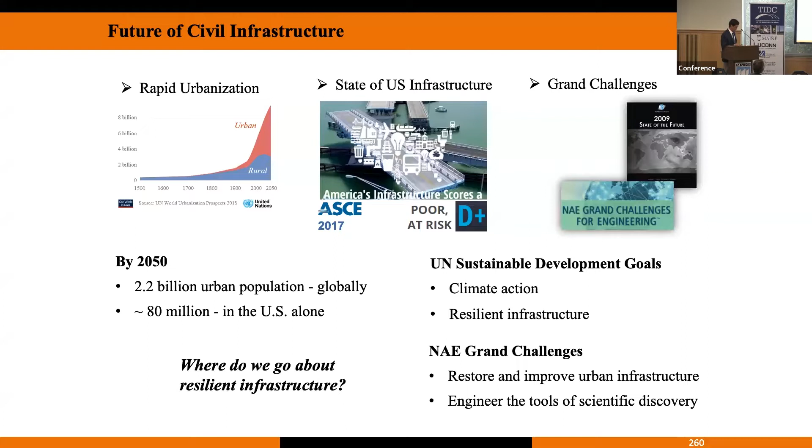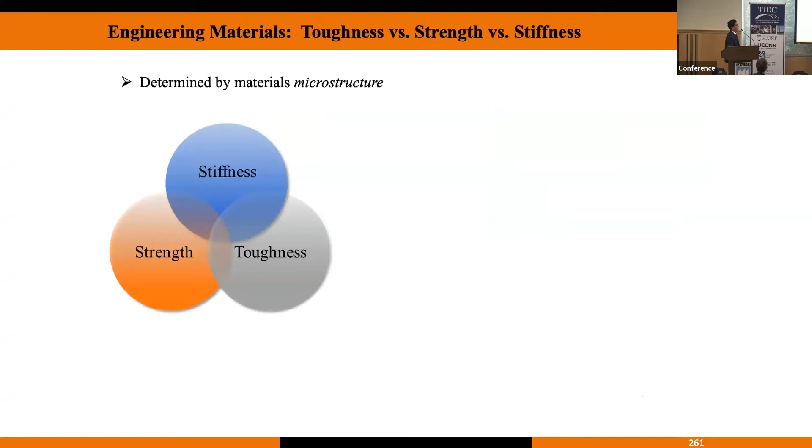How do we go about resilient infrastructure? If you think about the fundamental properties of material—strength, toughness, and stiffness—this comes with a trade-off. The way we process the material affects the microstructure, and that defines the properties and performance. When you come up with fiber reinforced concrete or polymer reinforced concrete, what we're changing is the microstructure. Therefore, you can control the properties and performance, and hopefully improve the durability.

But that comes from the fact that we process the material in mostly conventional ways, by casting, pultruding, or ways that are considered advanced manufacturing for the most part. But that's not the only way we can manufacture the structures. You can manufacture structures through various ways, by laser processes, by additive manufacturing these days.

That means you can control not only the microstructure, but also the mesostructure, where depending on your nozzle size, you can control the architecture of the structure. That enables another degree of freedom to control the properties and performances at scales more applicable to infrastructure materials, hopefully without the cost of expensive advanced manufacturing processes.

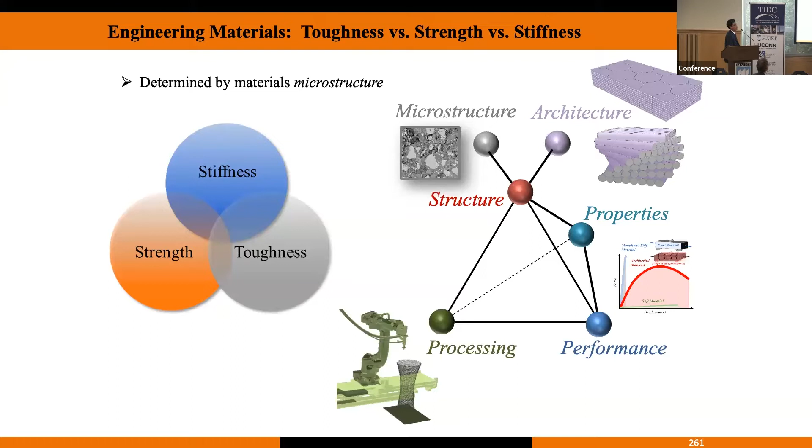So back to this chart, there is a scale. At this scale, you can change the way you process the material, change the microstructure, but civil infrastructure is here, right? In between, you have this architecture scale where you can change the way you arrange the material.

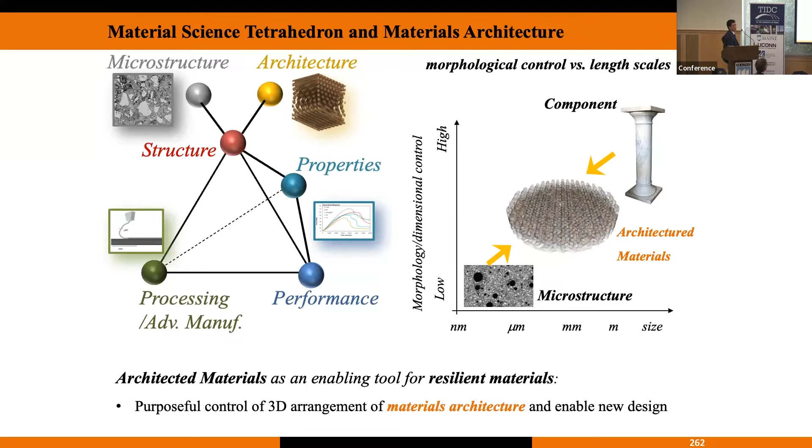Of course, you have to have the processing in place. With that comes the definition of architected material, where you can define and design purposeful arrangements of material and therefore control their response. So what we do, for the most part, at least in my group...

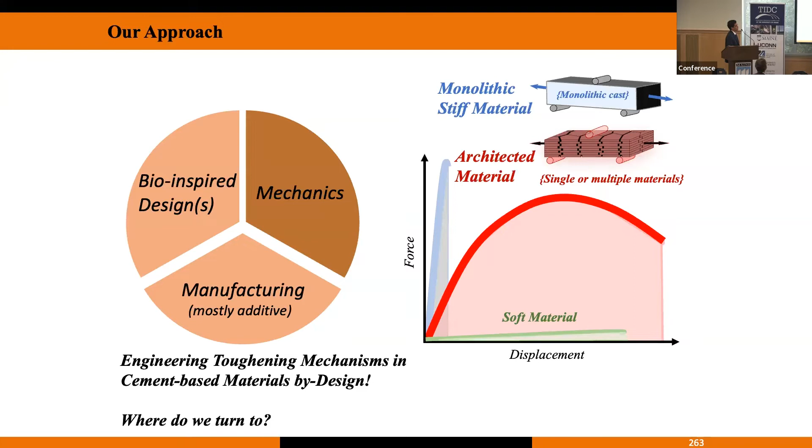For us, design comes from nature. We turn to nature. Nature offers abundant examples of resilient biological materials that can inform the design of hopefully resilient infrastructure. Of course, you have to have enabling manufacturing processes, and you have to understand the mechanics that informs these designs.

I'm going to do a quick transition to nature and back to more real context. If you think about nature, the building blocks of nature are basically either proteins on one side, which are ductile and deformable but not so strong - they don't have high strength. On the other side, you have minerals - calcites and aragonites that have high strength but are brittle.

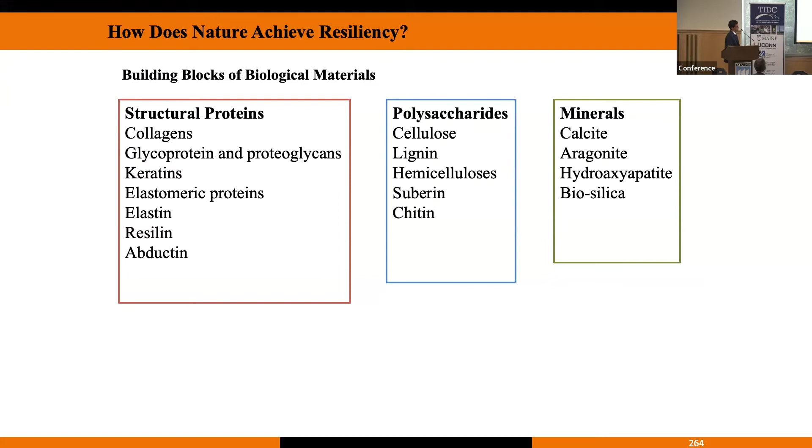In between, of course, you have polysaccharides. The more you move this way, you get stiffer, stronger material. The more you move back, you get tougher material, more ductility.

So let's compare natural materials now in the context of strength, stiffness, and toughness with engineering materials. And of course, composite is going to be in this chart. Let's see where it is.

Here's the trade-off, right? Engineering materials, you can increase the stiffness, or the strength, by moving from essentially composite to ceramics. But of course, that comes at a cost on the y-axis - you have KIC, that's fracture toughness, in other words resistance to cracking. On the other side, you lose the ductility, you end up with a brittle response.

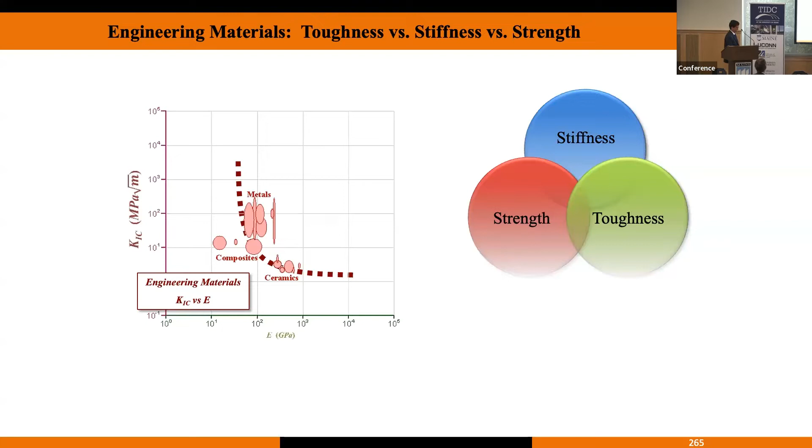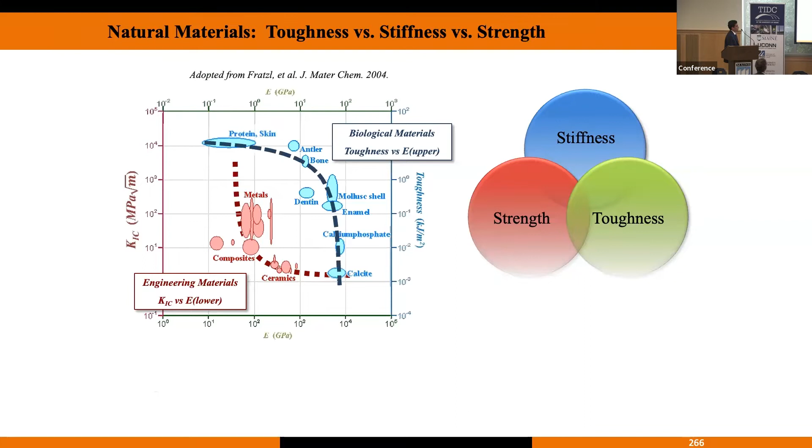There are abundant examples. Nacre, most of you probably know, but if you don't, mother of pearl - it's a shell, and it has a brick and mortar type of architecture, very different from the brick and mortar we know in construction, but actually not far from achieving that in construction.

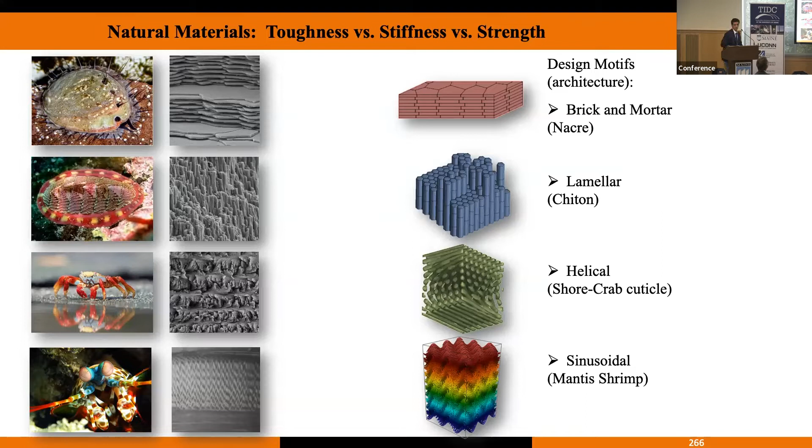And many other examples - chitons, mantis shrimp. It has the fastest punch in the animal kingdom, and if you don't put it in a glass aquarium, because it will break it for you, and so on.

There are many more examples, so I'm not going to get into the details, but what happens here is that, depending on the property you want, there are two ways you can design materials. One is you want impact resistance, ductility, or damage resistance. Depending on the property you want, you can go look for the right biological species, or you can be exploratory and find the right biological species you're interested in, and then try to understand the microstructure, but more importantly, the mechanisms with which the species survives and improves these trade-offs in material properties.

For example, if you take the nacre example, you can increase the toughness of otherwise brittle materials. 95% of nacre is calcite - there's only 5% polymer in there. But by arranging them in such a brick and mortar fashion, you can get a fracture toughness that is 3,000 times higher than the calcite itself.

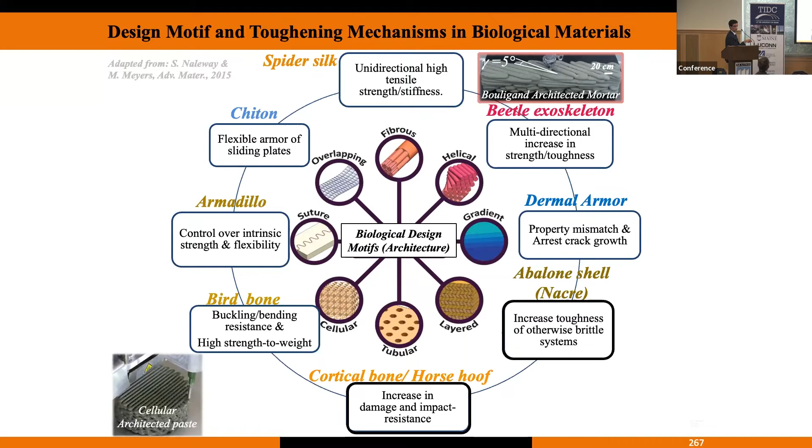So it's an interfibral bundle of fibers—you have fibers and then interfibral matrix in between. For every orientation, there's a bilayer orientation. It turns out that this layer essentially arrests the crack, while the other makes it harder for the crack to propagate, because as you twist the crack, it's harder to shear a crack than to open a crack, if that makes sense.

So there are a variety of examples, variety of mechanisms that exist in this one. I just mentioned crack arrest and crack twisting. But what happens is that if you fabricate mortar or concrete structures out of this using additive manufacturing, can you get improved properties? It turns out that you can.

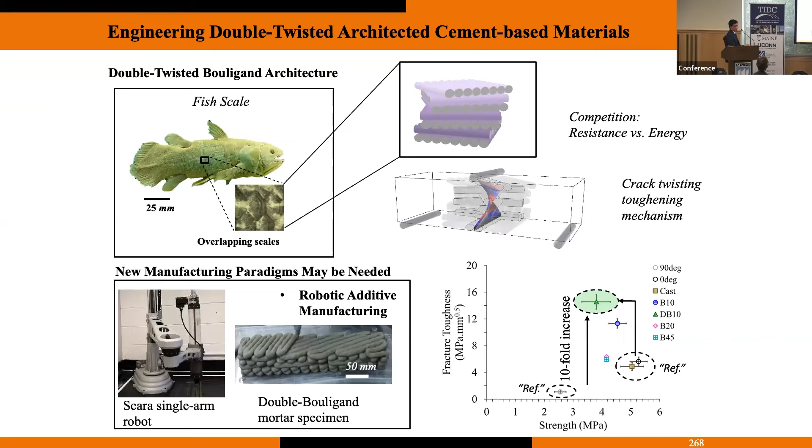Depending on your reference, this is your reference cast. If you just cast mortar in a mold and design your architecture informed by these systems, you can improve fracture toughness from 4 or 5 to 14—nearly 10 times higher, depending on where your reference is. So these things are possible, and people are using additive manufacturing, advanced manufacturing to do this.

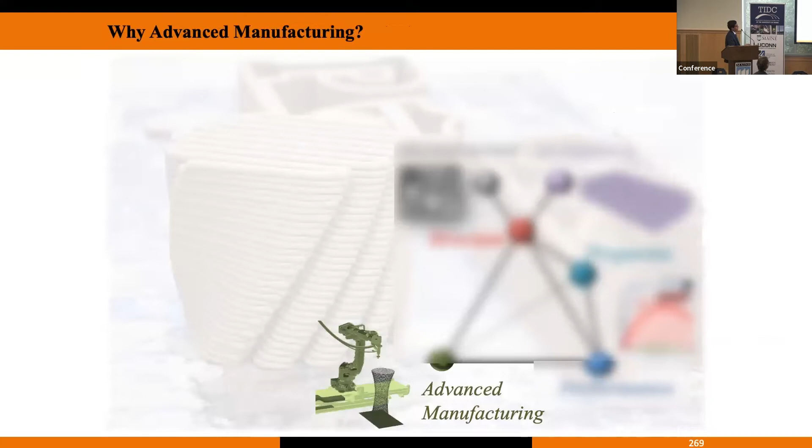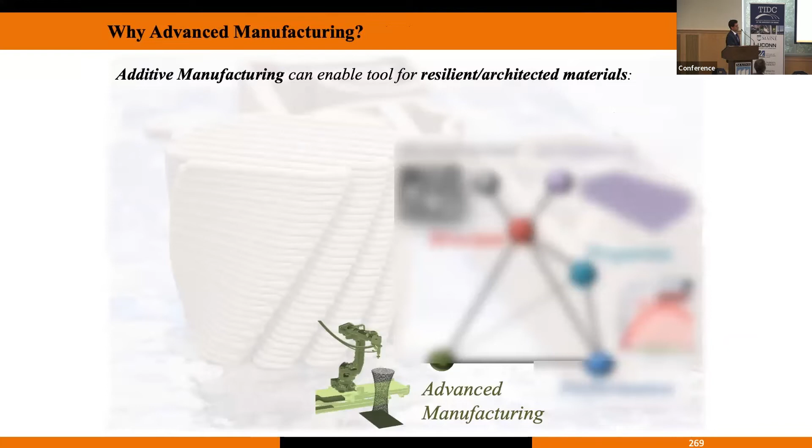So if I start thinking about what you can do to use these manufacturing processes to improve performance, you may ask, well, why additive manufacturing? It's an enabling tool to make stronger material, but more broadly, why additive manufacturing? Does everything need to be additively manufactured?

There are 3 main aspects. There is productivity—automotive and aerospace industries, everything being automated using more efficient materials and more efficient processes. Drew made a great point about efficient designs and technologies. The reason construction productivity has remained pretty flat for the past nearly 20 years is that we are not using any really automated processes in the system for the most part. So what can these automated processes help us with?

There is a debate between going down the route of prefabrication versus on-site. That depends on a variety of things. The other aspect related to this flat trend is automating the construction task.

So, okay, you can additively manufacture a house. You can maybe 3D print a bridge, which we don't know how it's going to respond because we're not there yet. But we're also not automating construction tasks. Automation in construction means many different things to people. Once you 3D print a house, you still need to automate the rest of the construction task. Have we ever seen a robot on a construction site? I doubt anybody has really seen it, unless you consider gantries and pavers as 3D printers—in that case, then yes.

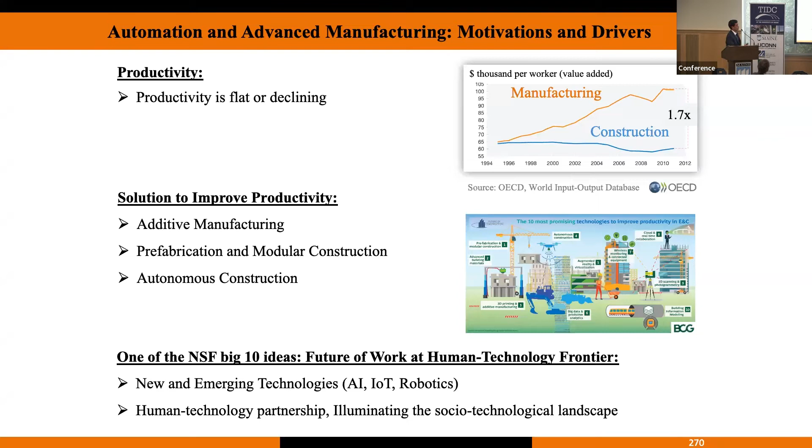The other aspect of using these automated manufacturing systems is that the other technologies are coming—AIs, Internet of Things, and robotics. They're coming, and they're more likely to participate in our society in ways we don't anticipate as they grow and become more dominant. So there could be a synergistic effect present in the future, which is why institutions and government agencies such as NSF are emphasizing thinking about these aspects.

So what has happened in additive manufacturing, as it transitioned more toward additive manufacturing, is that there has been a surge since 1994, since the inception of concrete 3D printing by Dr. Khoshnevis. There has been quite a lot of academic research, but also a lot of adoption in industry from startups, national labs, and agencies. However, as much as people say construction is not a very progressive industry, this is a very odd case, because today in the US, we are 3D printing walls of houses that are being permitted and sold.

However, from a research perspective, we have very little knowledge about how these structures would respond and behave. How are these structures being built? Of course, those are more of design-build projects as opposed to being permitted on a regular basis, similar to other timber structures. So we have the opportunity to think about better ways to design these structures that are already being built.

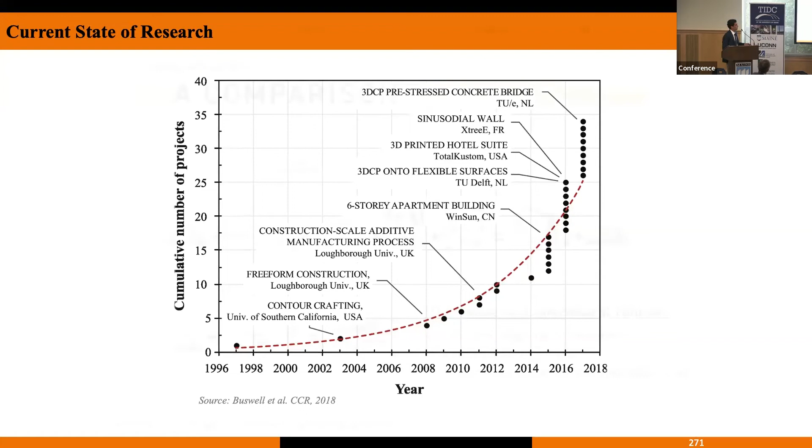The reason this is being adopted is that there is financial interest in terms of cost saving, improving productivity and transportation costs, which are basically the drivers of adoption at the moment. Would this be long-term adopted or not? This is a test to be conducted in the next 5-6 years.

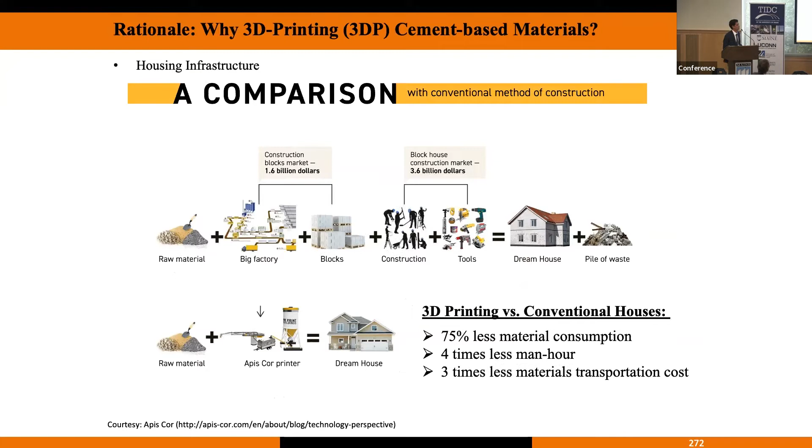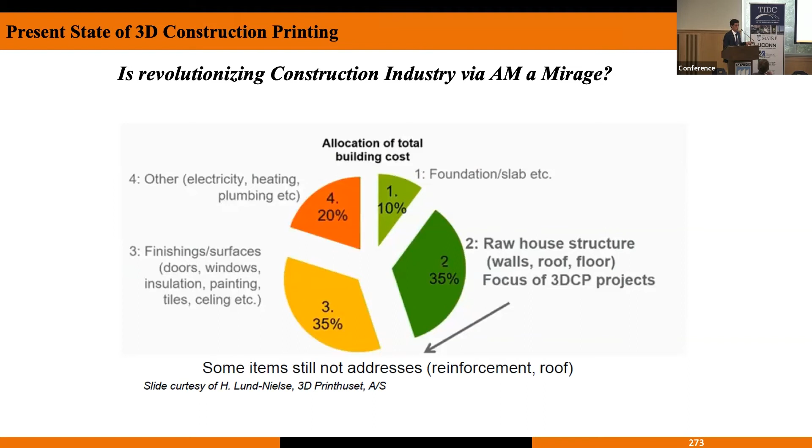Again, back to automating the construction task, additive manufacturing is only one piece of the puzzle, right? So you have the foundation, you have the raw house, so maybe you can 3D print these structures, but then the rest of the construction tasks are not automated, especially if you're thinking about additive manufacturing on site. And if you're thinking prefab, then there's the aspect of transportation.

So what are the key aspects? If we get into a little more detail, how is it done? Well, you have to have a processing platform that is specific, right? It's not plug and play. You have to have the relevant skills, the relevant materials, the relevant integration systems. And you have to develop your own material that is conducive to the process that you have adopted.

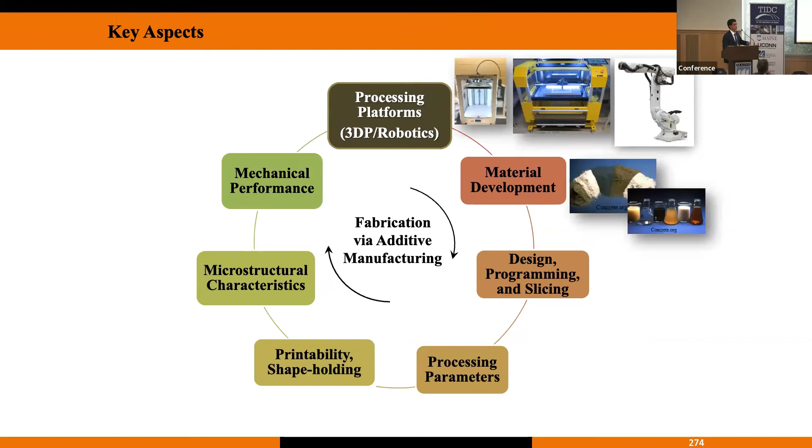Then you have to think about how you design them, how you program them, because these are layer by layer processes. Then you have to think about what are those parameters. And you have to think about, are they going to hold shape?

You remove the formwork. Whether you are in civil infrastructure or renewable energy, you could probably save about 50% cost, given some of the analysis that has been done, and provide design flexibility using these, because you have the freedom of design, which gives you the freedom of fabrication. But can you overcome the printability and shape stability issues?

These microstructural aspects are quite different in these systems. You have heterogeneities from the layer by layer processes. So there's a lot of unknowns, and then you still have to consider the mechanical performances. So there's a lot of unknowns, but one approach is to tap into the opportunities, thinking about new ways of designing, whether it's at the material scale or at the structural scale, while as a community we try to overcome these challenges.

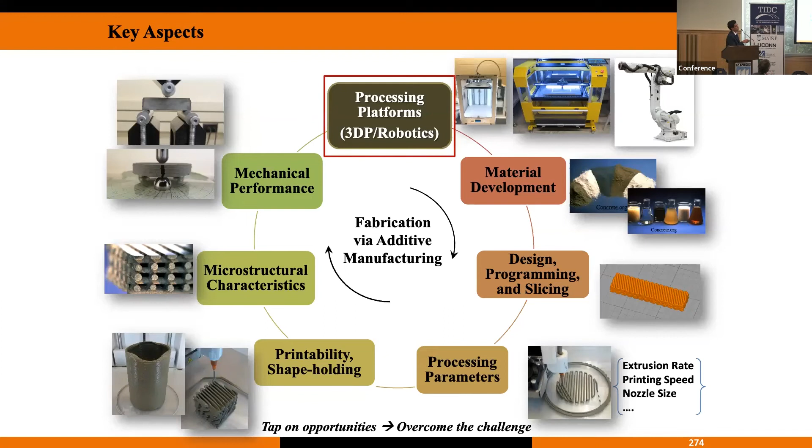So I'm going to talk a little more about the processing platforms, just so people have a little more idea. It has been done across different scales. Initially, it started from smaller scales at national labs and universities, and into component scales, again in universities and startups and so on.

Later on, U.S. Army Corps and a few other startups adopted it for fabricating larger structures. There has also been use of these structures - this is a 3D printed bridge in transportation systems, a 3D printed bridge in Madrid.

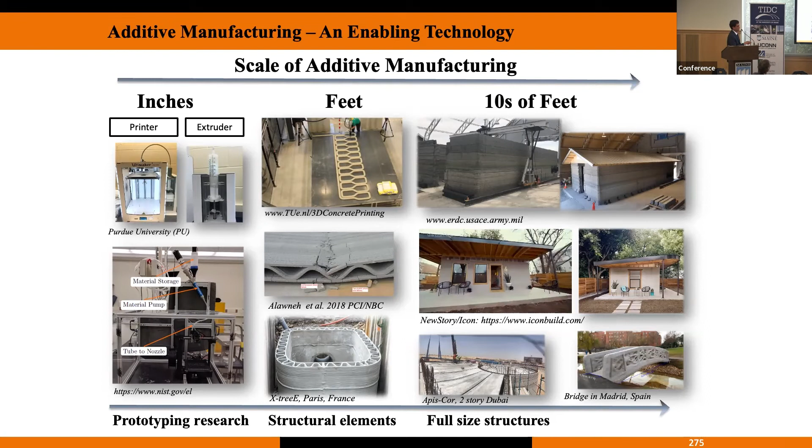And there are basically two-story housing that have 3D printed walls with essentially reinforcement in horizontal and vertical systems.

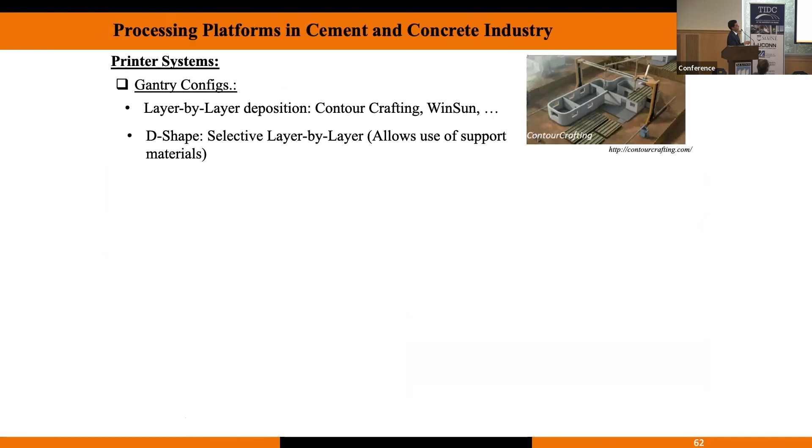So how is it done? Again, you either have a gantry configuration where you use a layer by layer process to deposit the material, or you have what's called D-shape. You have a powder bed onto which you deposit either the water if you have mortar, if you have a dry mortar, or cement paste if you have just aggregates.

The trade-off between these systems is that, well, with this one you have to overcome shape stability. With the other, you don't have to worry about shape stability, but then you have to consider a lot of the post-processes that have to happen to take out the support material that has been sitting there, and it's not a very clean process.

The other path for the platforms is the robotic configuration. So you can have a robot, but if you're taking it to the construction site, it needs to be a relatively mobile robot.

The advantage of using the system is that you can move it around, but then there are only so many industrial robots that are mainly developed for the automotive industry that can be used in construction.

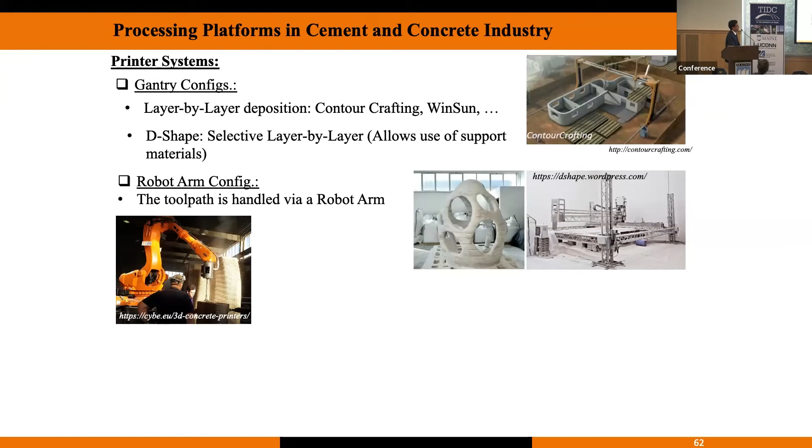On the other side, robots are more versatile and you can use them for various construction tasks, although that needs to be developed. There have been other systems used in Europe with smart dynamic casting, where you move the formwork, you're still casting concrete, pouring concrete into a mold, but you move the mold in order to create shapes.

That are perhaps more architecturally conducive. There are also cable-stayed configurations that Oak Ridge National Lab is working on. The extrusion systems also need to be considered, right? So this is only the robotic or the automotive side.

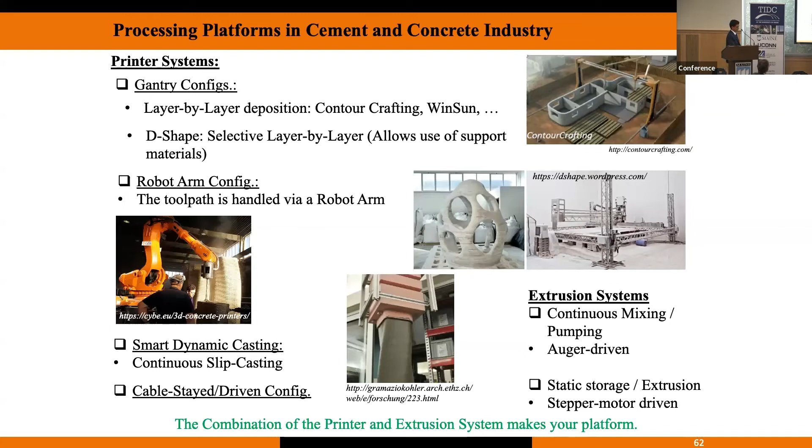You still need to integrate these with some type of continuous or semi-continuous mixing procedures to develop the system. So people have done quite a bit of work in these areas at the component or larger scale structures, where, for example, you have a gantry, this is TUE, and you connect that with a pump that extrudes a single material.

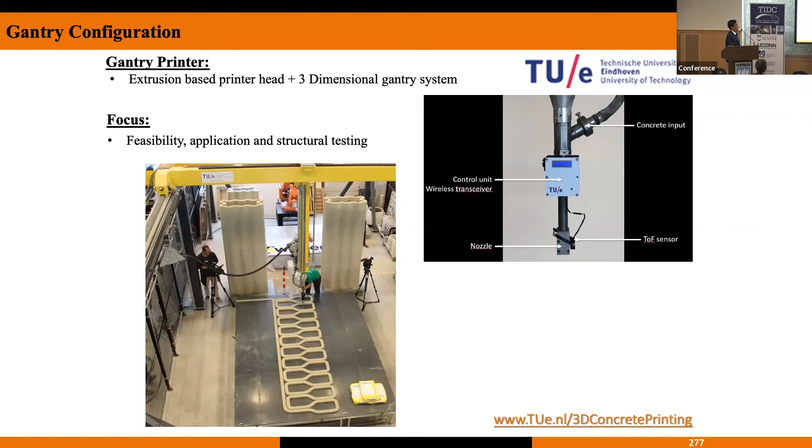There has also been a lot of development in terms of extruding multiple materials, or accelerating the cement hydration right at the tip of the nozzle, so you can reduce a lot of the mixing energy and settlement time in the process to make it more efficient.

This is essentially the same process as in laser, selective laser melting and selective laser sintering, where instead of depositing material, you just hit the bed with the laser and deposit new layers of powder every time you print.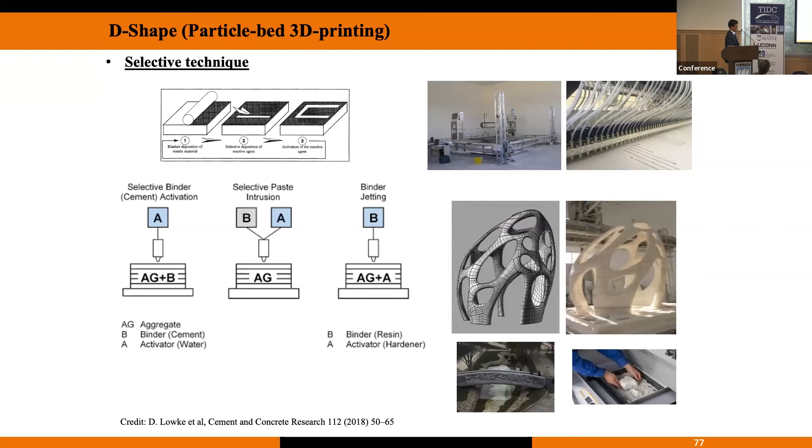Back to the construction tasks. There have been, again, a lot of efforts to use robots to, say, put the fabric of rebars together, to assemble a timber truss together, etc. But those are more of an off-site, prefab sort of setting, as opposed to on-site processes.

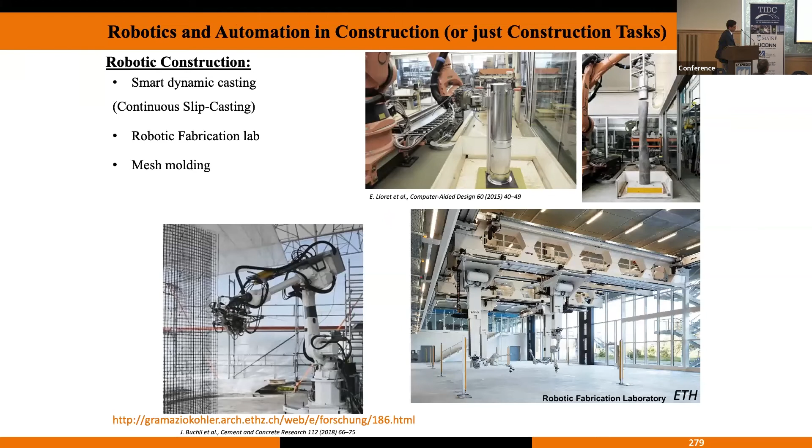At Princeton, we do a lot of our bio-inspired designs at the smaller scale because we can understand the response of the material. We then scale up to sort of a mortar level where we can use robot arms, and then we scale up to mono extrusion and two-component extrusion, where you can have a concrete accelerant.

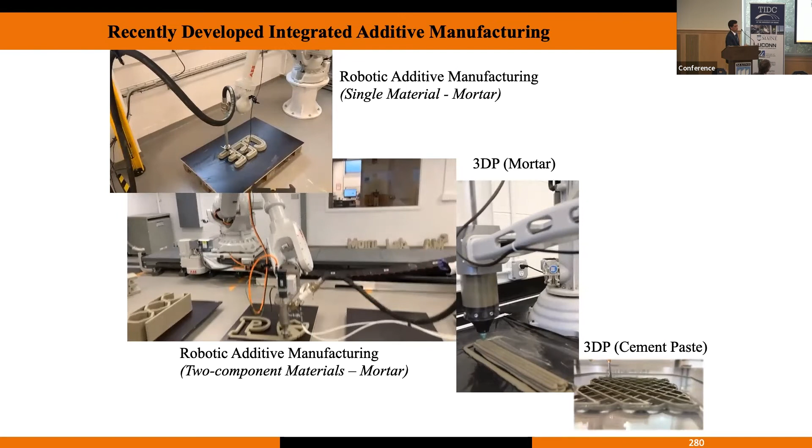Controlling - if I can get this to work again - you can have a concrete accelerant right here, controlling the solidification rates of the concrete as you deposit it. And of course, you can make taller and taller objects with this system.

The difference compared to conventional fabrication is that because additive manufacturing is a relatively controlled process, at least in the laboratory or prefab scales, there is so much you can do with introducing ways for making better material, for using sustainable binders, for solidifying materials that are otherwise more difficult to solidify.

For example, in terms of carbonation, you can only carbonate through the concrete so much. But if you can carbonate the material during the process, then you can use these additive processes to improve the way the materials solidify, and therefore help overcome their barriers to adoption.

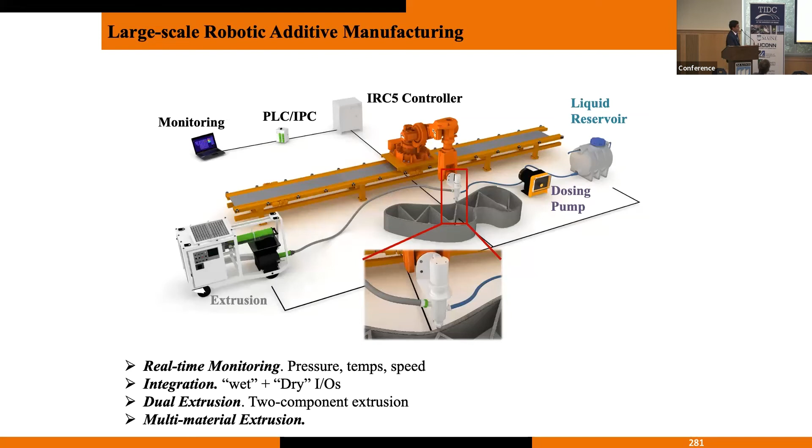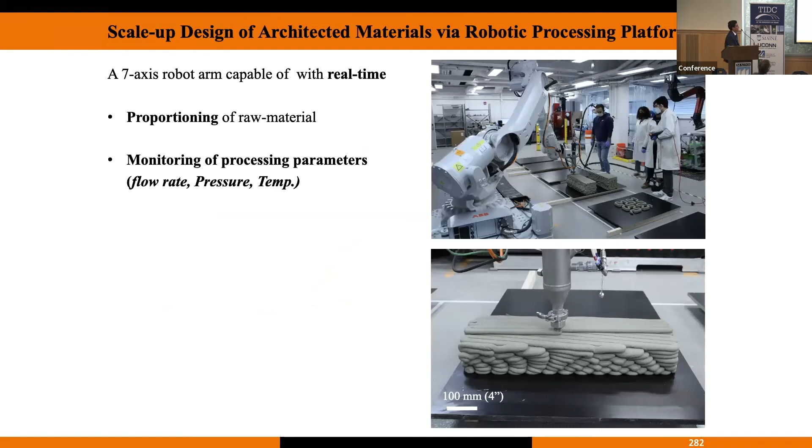You can also generate a lot of data, so you can understand how the material behaves, and how you can change the performance of the material, or change something in the process to improve the performance. So we do a lot of work in terms of in-situ controlling of the mix design and controlling the processing parameters, all to improve the material properties, but also to come up with better processing as well.

So in summary, this is a relatively interdisciplinary field, and we can talk about education, outreach, and awareness.

The challenge is, I think - and the previous speaker talked about this a little more in detail - civil engineers don't like to program robots.

Again, there's a lot of chemistry, a lot of characterization, a lot of understanding of fundamental mechanics and fundamental microstructure involved. We need to bring people from other fields who are excited, or excite the current and upcoming generation about these technologies. I teach a course in autonomous fabrication and robotics at Princeton, where I get the best questions I've ever had in any class I've taught so far.

People have these things already. We don't have to reinvent the wheel. A lot of the automation aspects, a lot of the processing aspects has been done. We can learn from other industries and bring experts like mechanical engineers and electrical engineers to help us do better control and better processing.

The other aspect is scaling up. These processes are specific. Everybody today does their own thing. They develop their own material, work with their own supplier, deploy their own robot, and program their own thing. And there's not a lot of data sharing. So scaling up becomes difficult, and translating information from one scale to another becomes difficult.

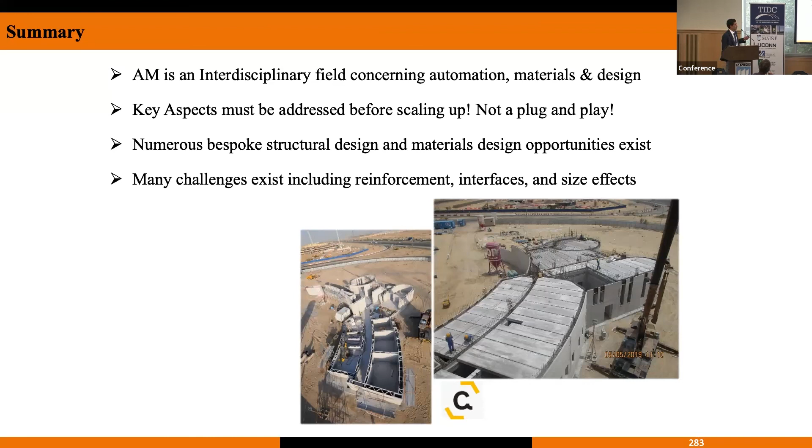Challenges are endless - I briefly touched on it: reinforcement, interfaces, the weak interfaces, and the size effects. There are numerous; I can give you a whole other hour talk. We could discuss for several hours the existing reinforcement strategies. But when we think about reinforcement, we're thinking about it in terms of conventional concrete. If you're changing something entirely different, then you can rethink your reinforcement strategies. The list goes on in terms of challenges, but I think the opportunities are more exciting.

I've been lucky to have a good group to work through some of these early works, and I do have to acknowledge my supporters. Since this is about sustainability and resilience, I hope I conveyed that it is possible to make stronger materials by design through additive manufacturing. It is also possible to make material more functional because you can introduce multiple materials into the system.

You can engineer material that can better capture carbon. They can capture water in terms of flood mitigation. We do have a small project with the Port Authority of New York and New Jersey, where we are looking into particle packing. So particle packing is another example of things that has been done, but maybe it's time to look into it in more detail.

ACI has a few committees on aggregate packing and particle size optimization. Just by changing, for example in this case, your particle size distribution - introducing intermediate aggregates - you can improve particle packing by quite a bit and help reduce the cement content by about 20%. We did this for Wisconsin DOT in 2015, 2016, and there was a lot of savings just using ordinary Portland cement concrete.

There is more to be done in this area of packing and particle size distribution. The ready-mix concrete industry, I think, is very well tuned with binary aggregates, but not necessarily very well tuned with using multiple sets of aggregates, where the asphalt industry is. People in the asphalt industry constantly use power curve 0.45, a variety of particle size distributions, to reach the ideal packing degrees. Those can be revisited when it comes to sustainable concrete alongside the additive technologies.

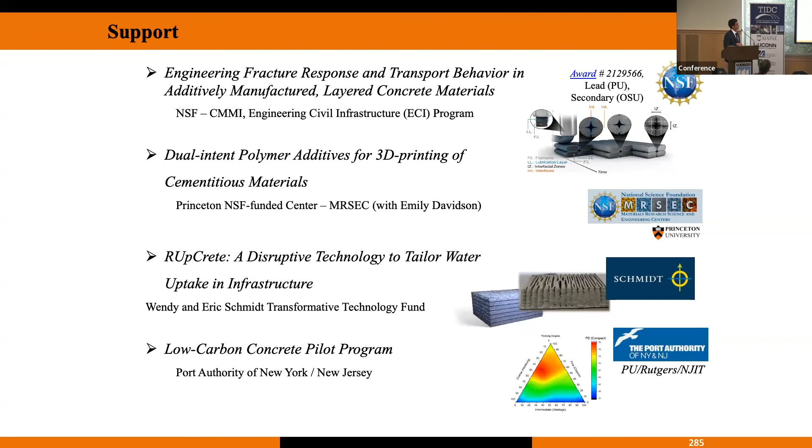I hope this was somewhat useful, and I'm looking forward to the rest of the discussion.